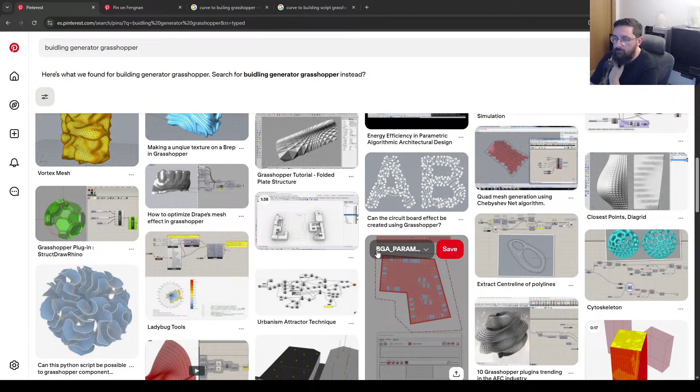I'm trying to find an example I saw for the inspiration for today's stream. Basically the idea behind today's stream is to have a contour, and then using that contour generate a series of building typology, I guess. I'm not sure what the best way to describe it would be, but the idea is to have a polygon and then use that to subdivide it.

I have an idea, but the thing is with this sort of script, it's very unpredictable and there's a lot of logistical things you have to resolve as you go through. We'll probably not have a super finished product by the end of it, but we'll have a strong sense of what direction this script will take.

I'm just trying to find the example I used, I guess. No, this isn't it. Urban architecture, Grasshopper script - there's this web page I found the other day, they do a really good job with it. Perhaps I can find it. Give me a sec, let me see if I can find the website. God damn it, I can't find it, I'm trying to go through my history here.

Anyway guys, tell me a little bit about your week. Are you guys studying, working? What's happening with you guys? Tell me what you've been up to. I'm trying to find it whilst you tell me what your week's been like.

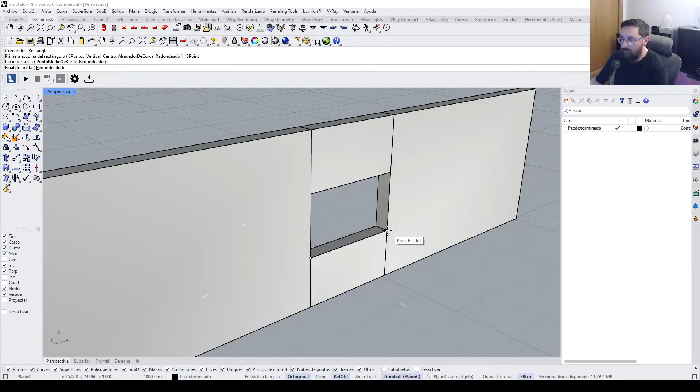So let's try and work out, because this is going to be like what we're trying to achieve, right? So my window frame is going to go here in the middle. The window is going to be whole drama, but we'll work it out, I guess. So what I'm thinking for the window is to have something like this.

Let's quickly see if I can model this. If you can't draw it, you can't understand it. So it's worth investing some time in doing a proper model of what we're trying to achieve.

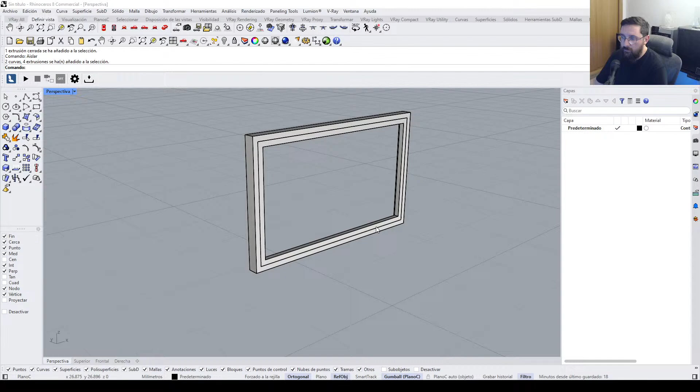So now the frame, we can simplify it, because for calculations it's probably better to simplify, but as a starting point I guess we could do something like this. So a frame like that where we can define the height, so we can go lower or taller. That's going to be one of our variables.

Okay, so we need to think about a logic on how to break or make these holes and windows. Imagine we have a curve, then we divide it, let's say in 6 parts, and split it into those segments. So we have a line partitioned in various parts, and we simply select every odd or even value, so we have 3 pieces of that line. Then we displace it, extrude it, and those are going to be our windows. From these surfaces we're going to generate the windows, and the rest is just going to be the wall.

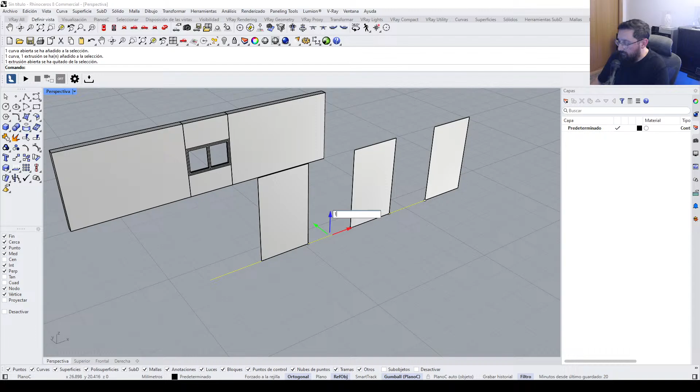So that's the logic, right? The rest is just going to be the wall. So this would be the walls, more or less, and these here would be the window reference. This would have a height of 1, for example, and then we could extrude by 1.2, and all the rest is the wall as well. This is sort of the logic I'm thinking of for this.

So what I'm going to do is put this in a folder, in a layer called reference. I'm going to turn that on and off whenever it's convenient to see. Now this is our curve.

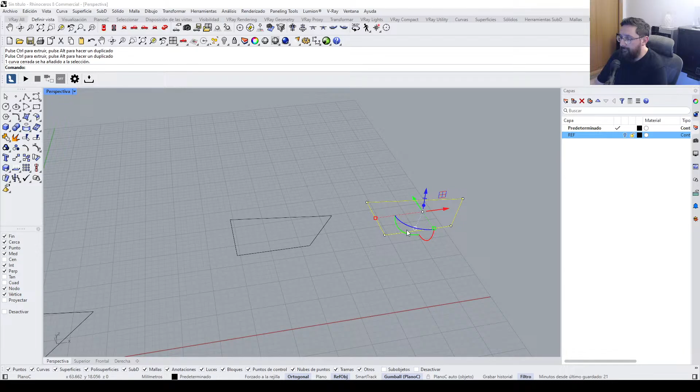Other issues that I can already feel have to be addressed at the beginning of the script are the normals, that's going to be one of the biggest issues. For those who don't know what I mean, if we have two polygons like so, and I flip one of them, rotate it 180 degrees, one is flipped over. If I generate surfaces from this and look at the normals, you're going to see the normal directions are different. So I need to find a way that if I have a million curves like this, I need all of the normals of all of these surfaces to be the same. That's going to be one of the first things we have to work out.

Is it best to work with NURBS or meshes? I think NURBS, just because meshes triangulate, so you're generating more vertices. And I think for Rhino it works a little bit better with poly surfaces. I wouldn't go into meshes. Personally I don't usually work with meshes, so for me it's a little bit of foreign territory.

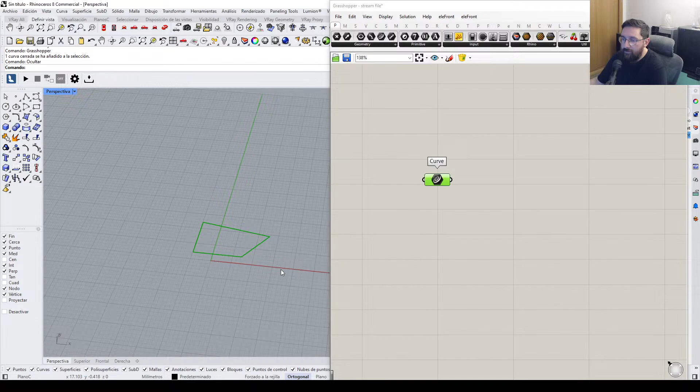So we have our curve. Then, as I said, we need to make sure that they're all flipped in the same direction. So how do we do that?

We can use what's called curve guide or guide curve, I don't know which one it is. Is it divide? No, guide. What's it called? Flip curve, I think it is flip curve.

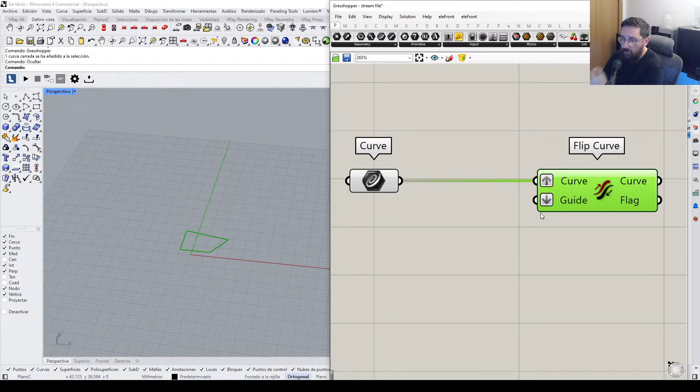Then we need to make sure that all of our curves are flipped by one guide curve. It's basically saying: I want you to flip all of these curves, all the curves we input, in the same direction as a curve that I assign. So to avoid any other references from Rhino, I'm just going to build a curve that I know is going to have a normal in the right direction, so I'm just going to use a rectangle.

I'm going to say XY, turn this off, the size is irrelevant, by default it's going to be 1. And then this is going to be my guide.

So to test this, I'm just going to do lots, and then some of them I'm just going to flip. So let's say this one, this one, this one I'm going to drag, I'm going to flip in the other direction. And I'm going to reference all of these curves here, set multiple curves, and then convert them into a surface. I'm going to turn all of this off for now.

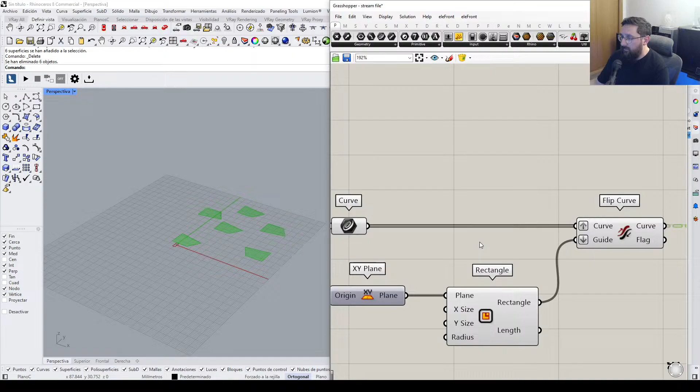I'm going to bake, and then review if it's working. Let's see, just quickly look. Yes, you can see that despite being flipped in other directions, it is now working. Whereas if I just extract it from here, you're going to probably see that one's flipping down, one is up, down, whatever. So our first crisis is already resolved, and trust me, that's probably one of the biggest headaches.

Okay, so we have this curve. I'm going to reference here, turn this off. Okay, so I now have my curve. Now this is where we have to think a little bit.

Okay, so I have my surface. I don't really need the surface now, I know that's going to come up later, so I'm just going to turn this off. I'm going to turn this off as well. I'm going to save for now, and I should probably save my curve in case something happens.

Let me try again, that didn't work. Save. Base curve.

So the next thing we need to do is work in segments, I guess, because we need to cut each segment individually. I just think it's going to be a little bit easier. I'm going to use explode. I have each segment separate.

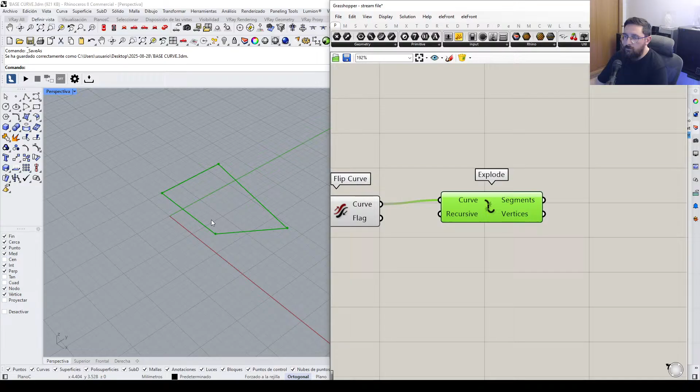Now, the idea here is to... okay, let me think about this very carefully. I'm going to start off with kind of a logical system, but I'm sure there's something we have to do in between.

If I divide, for example, in 5 parts, like so, I can't have my window here in this corner, or here, right?

Let me see if I can quickly draw. Let me see if I can get this working. Okay.

I need to make sure that this curve here, or this segment here and here, are not considered. And then this one is considered for the window, and this one is considered for the window. I think that's going to be the right approach. And this is going to be wall. So I need this to be wall. I need this to be wall. And then I need this to be window, window. And I need this to happen in all of the segments, right?

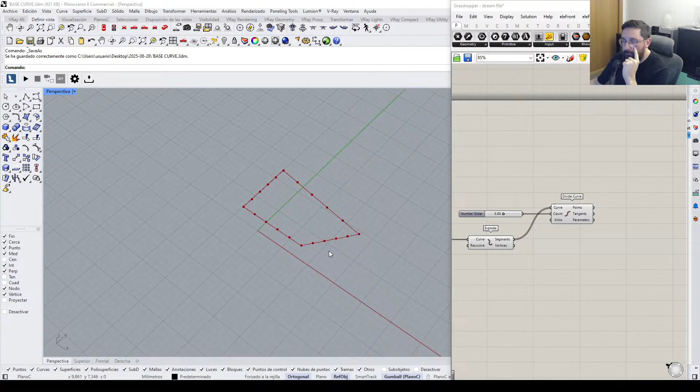So how can I ensure that I'm only affecting from here to here? Right, from here to here. I need to extend the curve this much. I think that's going to be the way to go. How can I do that? Can I eliminate the first and last curve? Or I could probably just extend it.

So I need a variable between 0 and 10. Let's say our window is going to be 2 meters in length. I'm going to call this window width.

Okay, so that way we know what it is. I'm going to disconnect this for now. I need to extend the curve, this one here, and I need to extend it in the negative direction, right?

So if I turn this off, I'm now resolving that issue. I'm getting rid of this. This isn't even considered because we have a new curve. We have a new curve.

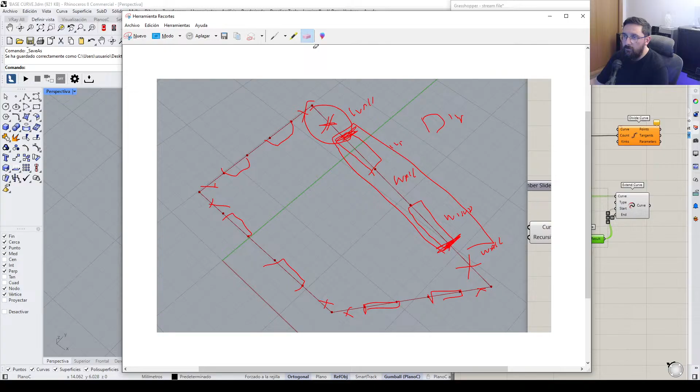Let me see if I can quickly delete all of this so we can see things properly. There we go. Okay, I need my curve to go from here to here.

We've reduced X, which is the window width, right? All of these divisions are X, right? So we've just removed X from here, and we're left with this line in the middle, and that's going to be our working line to generate the windows. I think that's the proper way to go around this.

I'm open to suggestions, by the way, so let me know. Okay, so this is the window width.

So if I have this curve, I'm going to measure the length because I don't know what the length is now, and then I'm going to do division because I want the length divided by, no, by the window width. That will tell me, so if I wanted to drive the script by window width, I would have to measure the length, divide it by the width, and that will give me the number of divisions, right? So let me just jot this down.

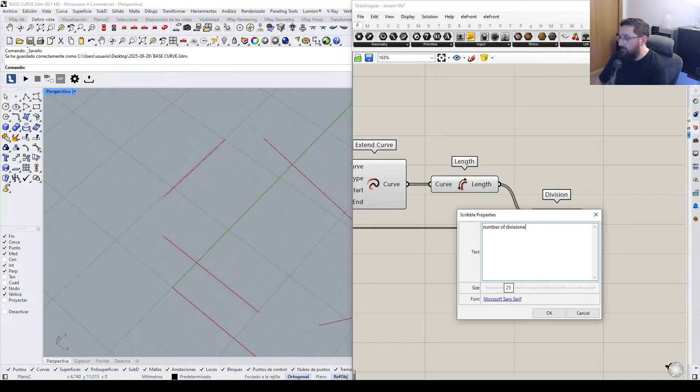Number of divisions, right? This will be this here. So there's going to be 4 values in this case, and then it will round it up. So I'm going to use these values to divide each curve, right? Curve, oh sorry, wrong, there. And the curve we're dividing is this bad boy here.

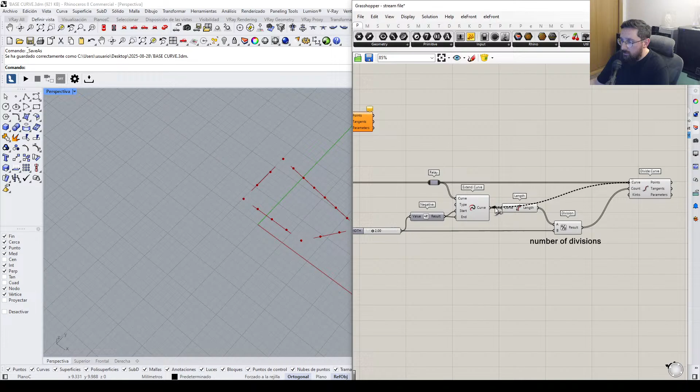So I think for this script we have to be as neat as possible, otherwise we can just go a bit overboard. So we're subdividing, oh no, that's the wrong curve. I need to subdivide the extended curve there, like so. I can get rid of this.

Yeah, you could also do that. I just think this one's a little more, I don't know, it's kind of the same thing eventually. But yeah, you can do it with the culling. You would have to cull the last and first of each one. Or you can just extend it, it's the same thing.

And then this way, when I divide it, I think the count... okay, let me work this out. The smallest curve, which is this one, is dividing by 2, 3. How's it rounding it up? This is the number of segments, that's correct. So I don't need to do any expressions or anything here.

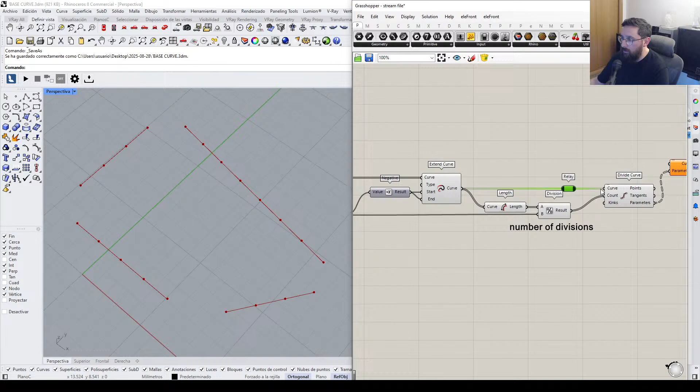Okay, so the idea is to shatter the curves, to cut the curves using these points, right? So I have these curves and I can just cut them using this here. I think I may need to graft. I'm just going to bake this to see if it's working. 1, 2, yeah, it's working.

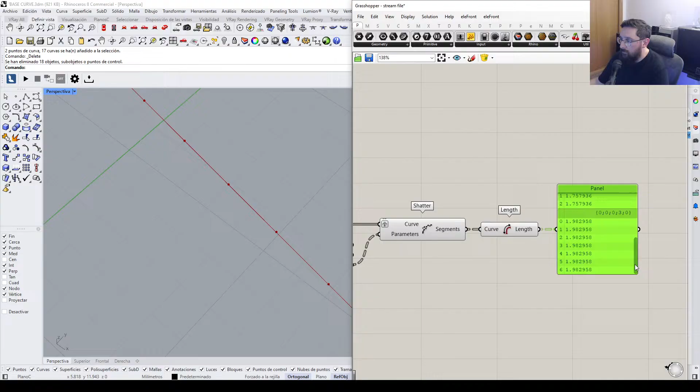Now, the issue here, I'm guessing, is that the length of each one of these curves is not exactly 2 meters, right? Because the divisions are not super precise. So if I were to use a length, and I measure this here, I get a length of 2, and then you get these decimals, which are bloody annoying.

Okay, so let me try and work this out. I can use an expression to sort this out. I could kind of guess this was going to happen, but I don't think there's a workaround or an elegant one. The idea is that if I have a curve which measures x, and I want this to be y, I know that x times a number equals y. That number equals y divided by x. Now y is going to be the window length, and x is the current measurement.

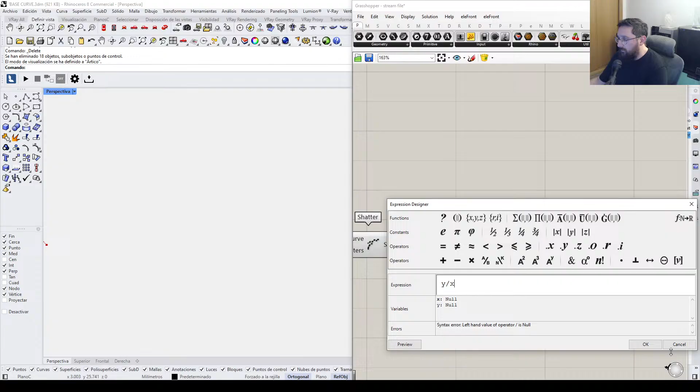So expression, I could just use a multiplication, but same thing. What was it? Y divided by x, where y is the intended value, which is this value here. I'm always referring back to the same number slider, this one here. Let me just get my cables right.

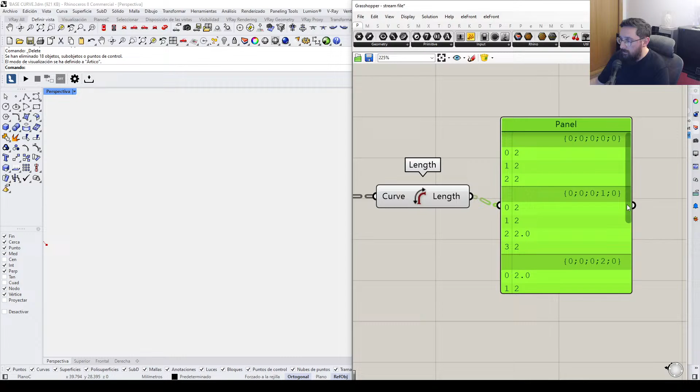By this value, and then I'm going to be scaling from the middle. This is me being super precise. By this value, and this is my curve. And then this way, in theory, if I measure it now, I should have 2 units exactly, right? In all of my values: 2, 2, 2, 2. So this is just being a super perfectionist.

And then if I change this value to 2.3, for example, if I do a before and after, it would become a little bit more evident. Where if I measure the lengths here, you're going to see that it's not 2.3, it's always going to be like 2.2, 2.3 — they're all different. But doing it this way, I'm making sure that all of the lengths of the windows are actually correct. Hopefully that made sense.

I'm going to leave a note here actually. I'm going to put this in a group. Put scribble, there we go. This is to ensure that the window width is exact and not approximate.

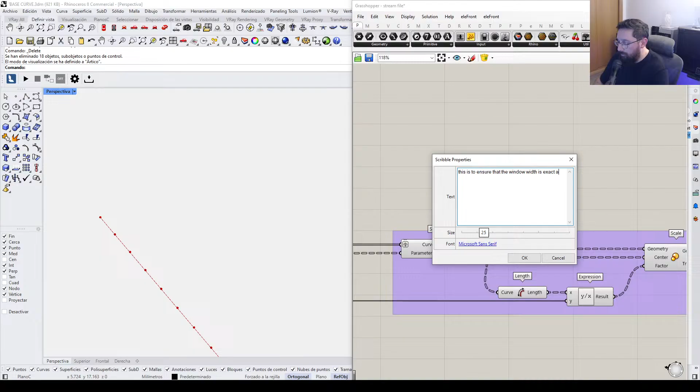Okay, so I have the curves I need. I'm going to turn everything I don't need off. And then here, this is where we're going to dispatch, and then we just choose one of these. Now I am going to simplify over here. And here I'm just going to turn this off. And we here now have the selection, right? We could choose the other, either one, it's fine. I don't think it's going to be that much of an issue.

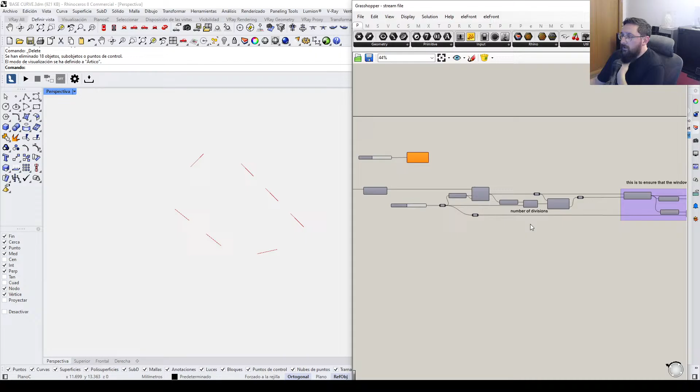So I'm just going to go ahead and save. And already it's starting to look interesting. Now, the hardest part of this sort of script is memorizing where and why we did everything, right? Give me a sec, guys.

There we go. So this controls the number of divisions, the points generated, extended curves. Okay, so we have these curves. Now this is where it gets interesting. Okay, so let's define the windows. So this part of the script is going to be the windows. We'll sort out everything else afterwards.

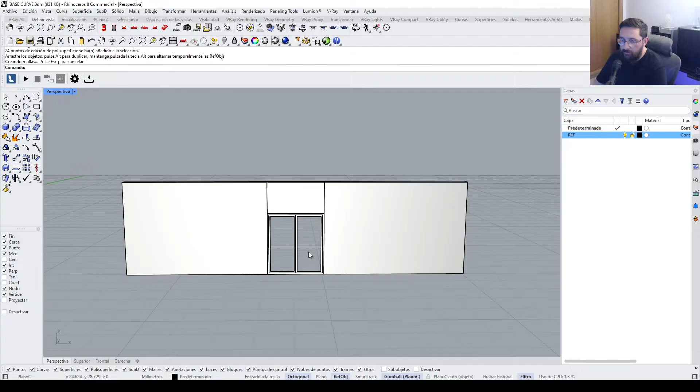You know what? I'm thinking that instead of having windows, why don't we just do balconies? Right? So if I use my reference, instead of having windows, we can have the window starting from the floor going up like that, right? And then we can change the height and the width. I think that could be interesting. That's going to be a lot more interesting.

Okay, so we have the curves. So we need to define the height of the doors, so this is going to be Z. Number slider that goes between 0 and 5, we're going to be generous. I'm going to say 2.2.

Is it best to use Elefront or build? You could use Elefront, but it's a little bit more... I don't know, you're relying too much on a plugin. I tend to try and use as many native components as possible.

Anyway, we're going to be only doing one floor, and then we're going to copy and paste that many times by whatever amount of heights we want. So once we're done with one floor, we could convert it into a block and then copy and paste a block, right? I reckon that makes a little bit more sense. But yeah, I like the way you're thinking, because it might be a little bit better.

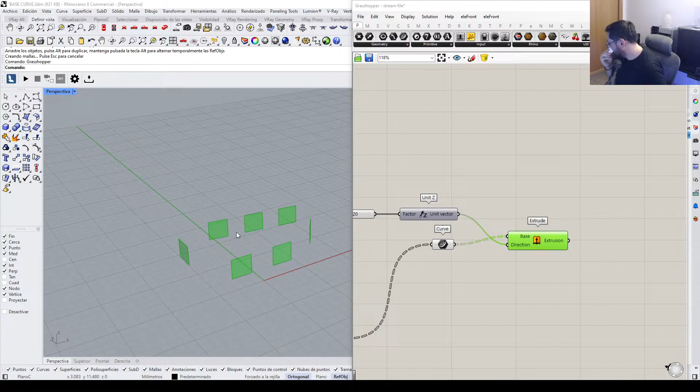Sorry guys, the thing is, here in Spain it's really bloody hot, and then we have to have the air conditioning on all the time, and when you change from one temperature to another, it kind of produces this allergy. So I ask for your lax judgment.

Okay, so we have the extrusion. I'm going to put this over here. This number slider, I'm going to change the name. This is going to be the... let's call it door height, because it's no longer a window, it's now a door. Door height.

Okay, and then we're going to basically generate the window here. Now, how can we approach this? I want to subdivide this. So if perhaps we don't want 2 frames, perhaps we want 3, right?

So what I'm thinking is that we can use an Isotrim. What's the component? Construct domain. There's one. Is it divide domain? Yeah, this one here. Ha, found you.

Between 0 and 10, I'm going to say 2. I'm going to copy and paste this. This is going to be 1. My domain is going to be this surface. This is going to be here. And this needs to be reparameterized.

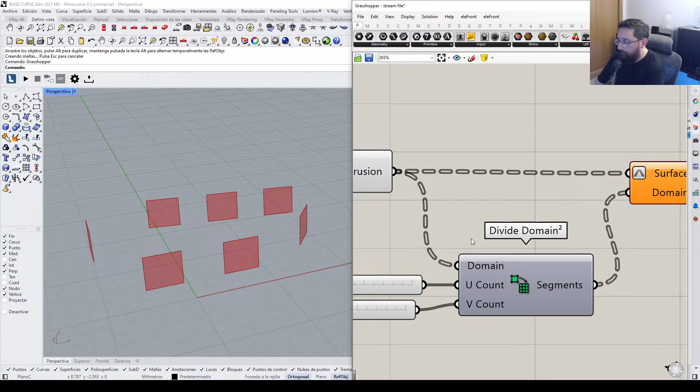Is that right? I might be wrong. This might need to be reparameterized. I don't remember how to do this. Do you guys know? I basically want to divide this. I don't want to use a plugin. That's the thing, I know there's... I would usually just use...

I would usually use Lunchbox. The surface here, reparameterize. I think this needs to be reparameterized, but it doesn't have the option. So instead, I can just do it here. I don't have the option. Why? Simplify. Why don't I have the option? I mean, I can just do this, reparameterize.

Or actually, I can just turn it into a surface. And I know for sure that the surface allows me to use this, there we go. Haha, you won't beat me, grasshopper. I will always win.

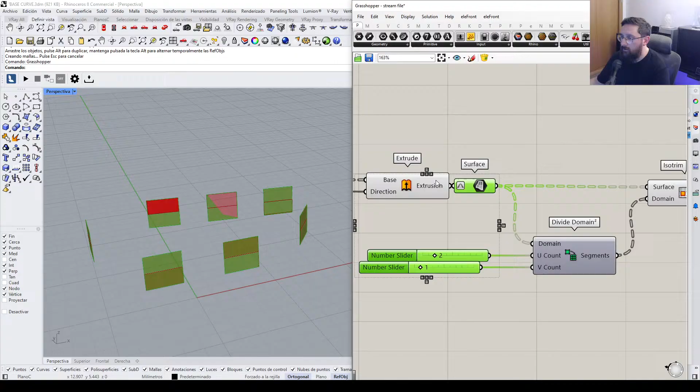Okay, we're back on track. So here the surface is... there's something wrong here. What's happening? Simplify, no. Domain, surface, extrusion. What's happening here?

Do I need to graft? I did need to graft. Okay, there we go. The other direction, so this would be 1 and this would be 2.

So you can see here, if I zoom in, you can see that I now have the frame, right? Whereas if I want 3 frames, I can do 3. Don't know if you guys can see it there. Yeah, so we have that.

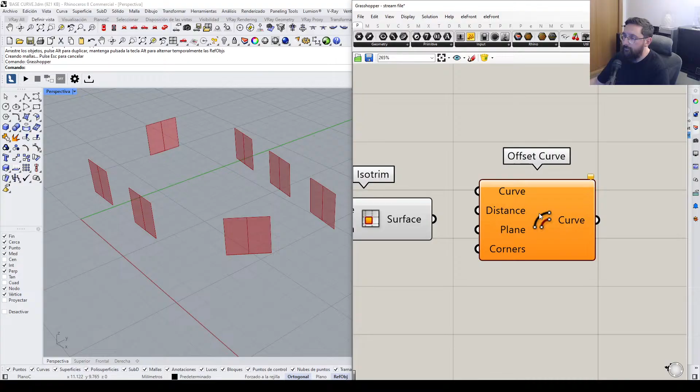Now we need to do the frame in the interior. So I'm going to use an offset curve. Where are you? Offset curve. I need it to offset inwards. The frame thickness, I'm just going to say between 0 and 1. And I'm going to set the value at 0.05. This is my curve. Now, I don't think it will always go inwards.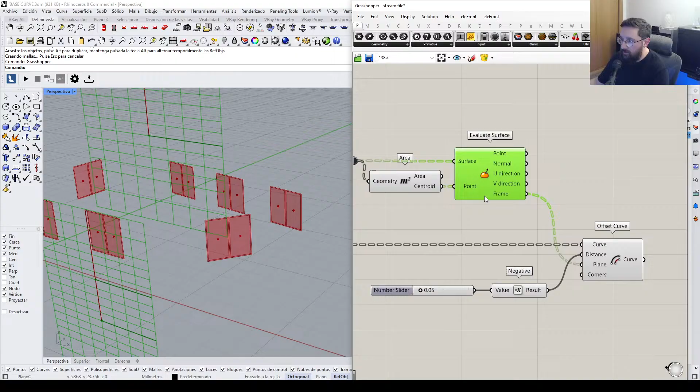So I'm going to make sure it's always going inwards by using an evaluate surface. It requires a point. This is my surface. I'm going to just do this. That way I can have the frame, and the frame is basically always going to define which direction is inwards and outwards, because you're basically saying you want the direction to be towards the centroid, not out of the surface, and then it's contained within the frame. So it's understanding that negative is going inwards.

Okay, so we have this. We now have the door. Now we need to actually create the frame. Okay, let me just quickly change the name of this. This is going to be door frame thickness. Let me just drag this out.

What's the difference? It's the same, but in this case it's giving you like where it's contained, I guess. But yeah, essentially it's just a plane, and it gives you the normal directions too.

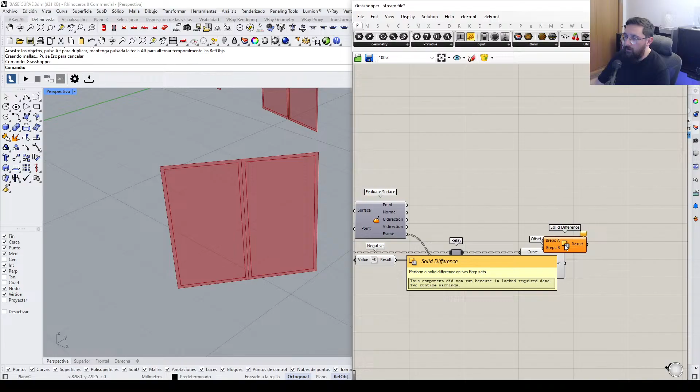Okay, let me just push this out of the way. I'm going to do a solid difference here. The outer curve, which is this one, I need to make sure it's grafted before I do anything. Graft. I'm also going to simplify just in case. Graft, simplify. This is going to go there. And then this way, I now have the frames like so.

Okay, so we have that, and I can convert this offsetted curve as the windows. So this is the window, this is the window frame. We can give this a thickness, but for computational reasons, I'm just going to leave it without a thickness because I know it's going to take longer to load.

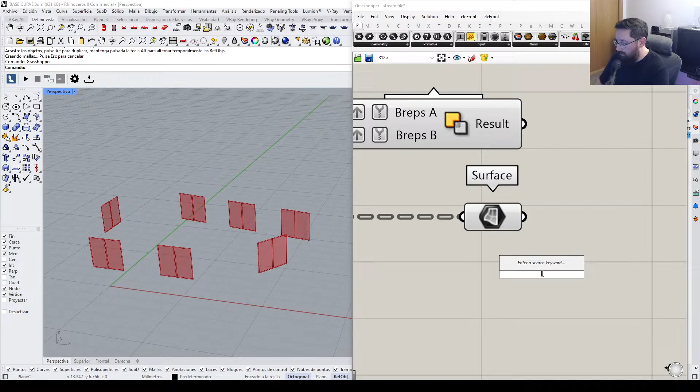So what I'm going to do is give it a custom color just so I can visualize this a little better. I'm going to use color swatch. This is going to be baby blue. And then the frame could be black, and that way we can differentiate it a little better.

Let me just line everything up. So I'm going to change to black, and we have our window frames. Okay, we're getting somewhere in life. Let me just think how I can make it better. Yeah, let me just leave it like that actually.

Okay, so we have the windows, right? I'm going to turn that off. What I'm interested in is this plane, because now the logic is going to be the following.

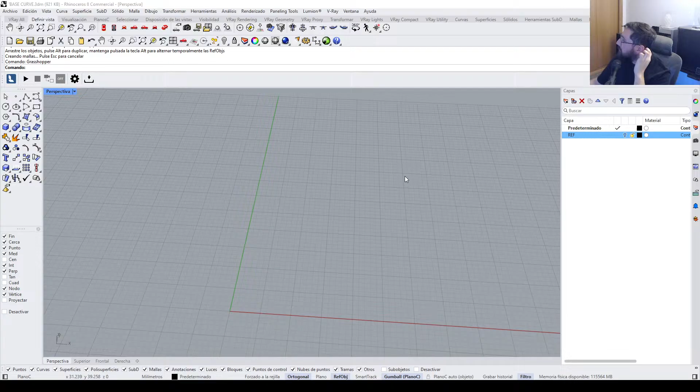So we're going to have these walls, right, with a thickness of 0.3. This wall's going to have a height. Why is it not extruding? There you go. We're going to have this wall, and then the plane or extrusion we have from before.

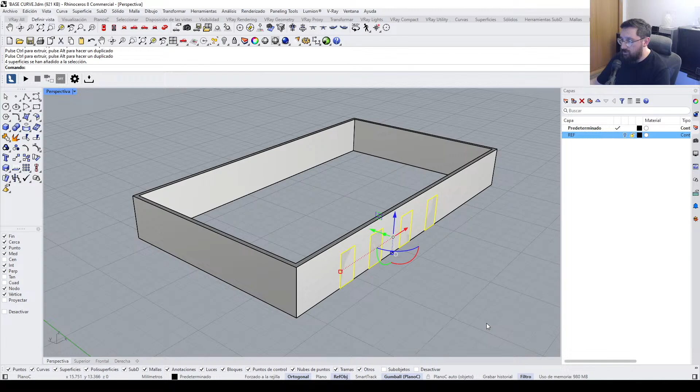Let's imagine this is my door. Let me line it up. We create the wall, and then we'll have all of these doors. What I need to do is extrude these doors inwards or outwards, that's something we have to define, and then do a Boolean difference between these two, so that we have these holes, and our frames are already inside so we don't have to do anything there. That's the logic.

Will it work? I don't know, but we'll work it out.

Okay, so these are my windows. I need to go back to my curves, so let me extract that from here. This is my base curve. I'll bring this down. This is my base curve.

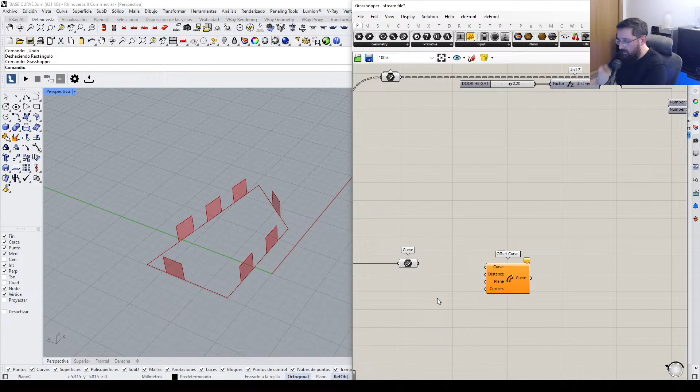Okay, so I want the frame to be inside, so I'm going to offset outwards. Offset curve, direction positive. That's too big, I'll say a thickness of 30 centimeters. It's already in the right direction because I've already flipped the curve before.

Okay, let's change the name, this is going to be wall thickness. Okay, now what are we going to do? We need to do a solid difference between the big curve, the outer curve, minus the inner curve.

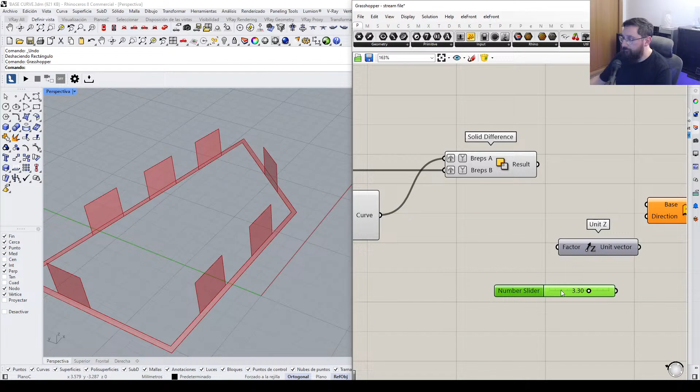And I need to make sure it's grafted, so graft, graft. I'm also going to simplify just in case. And then here I'm going to extrude in the Z direction, whatever height I want, I'll say 3.3 between slabs. This is my direction, this goes here. Okay, this is wall height, an important parameter.

Okay, I'm going to leave that on standby because we need to do a few things before. I need to extrude these surfaces in the perpendicular direction, making sure it always goes outwards. How do I do that? I would have to create a custom vector according to this offset. Now, how do I do that?

Okay, so I can do it using vectors, or I can do it with evaluate surface. Yeah, but how do you tell Grasshopper that you want it in the direction out of the polygon of the base curve?

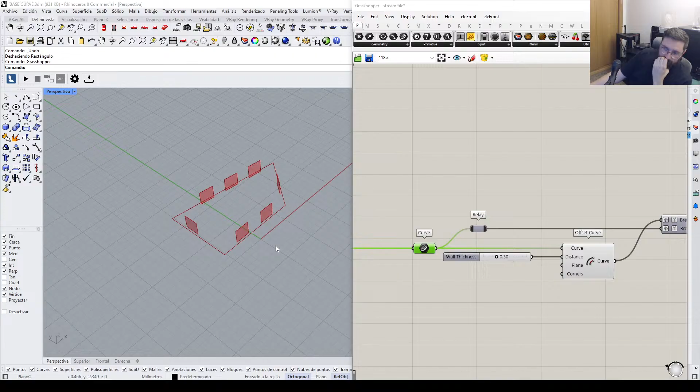Okay, I have an idea. We have these curves, right, we have the bottom curve. I just need to tell it a direction, so we can create a direction. I need a vector, and a vector is defined by two points. So I need a point on this curve, then another point on the outer curve, and connect the two. I need to make sure it's perpendicular. Okay, so if I extract the middle point of this curve here, I need to find the perpendicular to this curve here, which is essentially the closest point.

Curve closest point, this to... shit, so this one. There's a lot of unknowns though, because I'm always talking about one curve, but the idea is to have more than one, so I'm not sure how that's going to match up. Ah, it matches up fine.

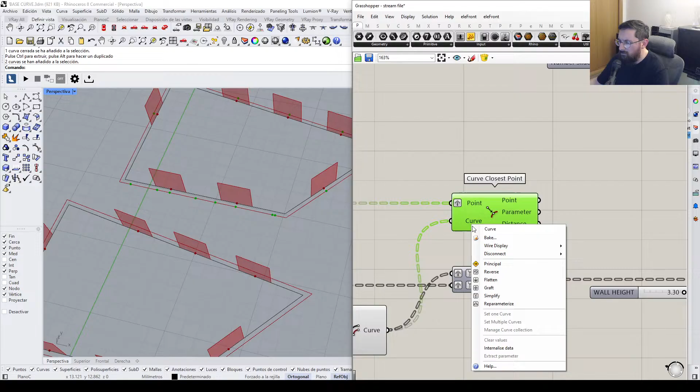Ah, here you see it creates these duplicates because I need these to be grafted as well. This is where it gets tricky, my friends. I don't need to simplify, I can't simplify before. Yeah, this is where it gets annoying, annoyingly tough.

Any ideas? I'm just going to quickly draw something, see if this works. Help me out, guys, help me out, help me. It's that part of the script where you're like, oh lord. How, if I find the closest point.

Surface is this one here. Do I simplify? Is it? I don't know, I'm actually quite gobsmacked. The issue is that distance here. Graft, no. Simplify, I don't know, this is where...

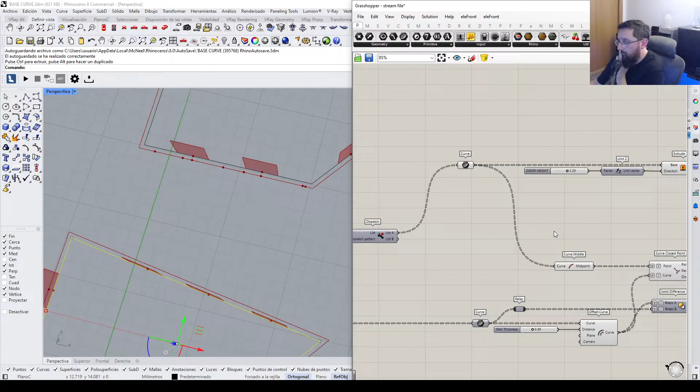Here, this is my curve point. I just don't understand why it's not taking this one into account. It's taking this one. It should work, like, that's the thing that's bugging me.

It should work. Okay, so this has two points. Why do I have two middle points? Oh, because this is based on the curve. Some curves have more segments than the other. Polyline, here I have this.

So I should probably simplify this one. Here I have one. If I simplify this one, I still have... that means I should probably simplify further back.

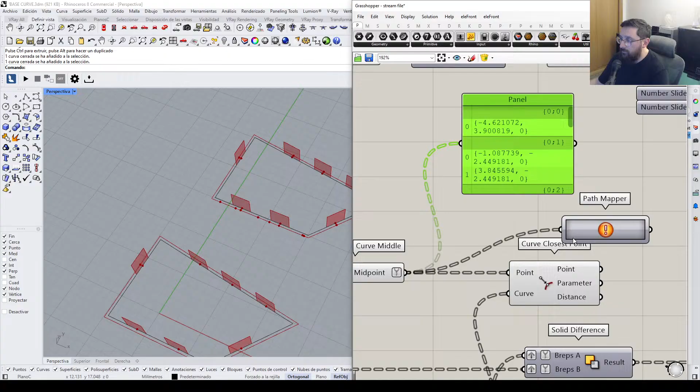1, 2. Is it a graph mapper? No, path mapper, where I filter out, for example... there we go, yeah, it's the path. Okay, fair enough. It's something to do with the tree. So I now have, okay, yeah, fair enough, that works.

Yeah, you just have to be really hyper aware with this sort of thing. Okay, that works. Okay, so we have the curve, not the curve, the point rather. This is now the points. I need to create the vector, so vector to points. The direction is from in outwards.

This is a mosquito. Unitize and amplitude, because I wanted to find how long the vector is considered. The length has to be the same as the offset, so it has to be the same as this.

Now, just to make sure everything is nice and neat, I'm going to put this underneath. And actually no, I'm going to put this underneath. Bang, bang, I have the vector. I need space, so I'm going to quickly bring this down. I have the vector. This is what? What's this? This isn't... oh, this is the wall.

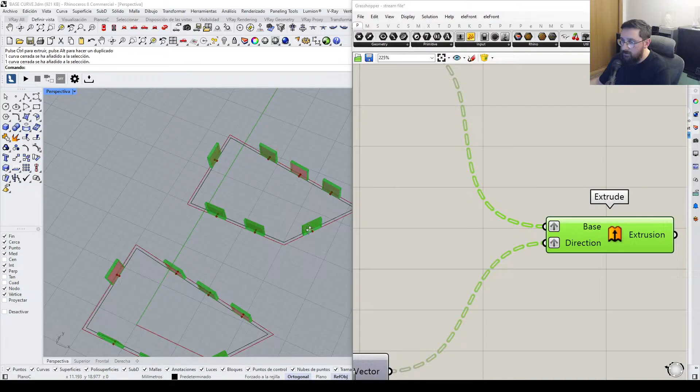So I need the extrusion. Let me move all of this over here. Extrusion, extrude the extrusion. Bang, and I need to make sure this is grafted. And we have those solids. Okay.

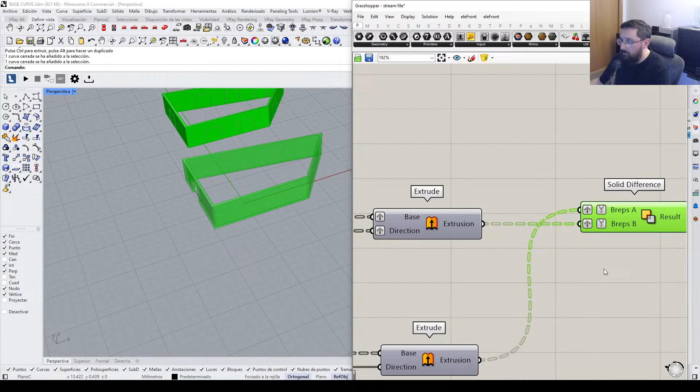And then here, solid difference. So I need to graft, I need to flatten this. Or I can graft, I think. It might work with the grafting. Yeah, or maybe not, simplify. Ah, that's annoying. There you go, okay, that worked.

And then here I have the windows. Ah, there we go. That worked. Okay, so I mean, you can always add to this. I'm thinking of doing a terrace. So the good thing is that we have the vector defined, and this is going to be super useful for us.

What I'm going to do is label things a little bit. Let's see if we can synthesize this a little bit. Okay, so this is going to be the wall thickness. So what I'm thinking is to have a balcony. Why am I doing this to myself? Balcony, okay, so let me just turn this off.

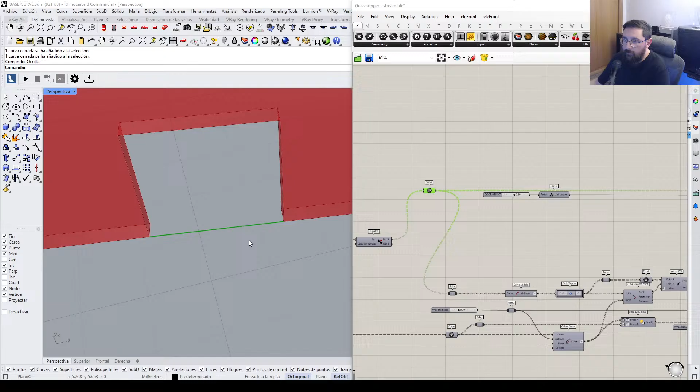I have this curve from before, right, which is the 2 meters or whatever the balcony width, the window width is. So if I actually reduce that for now, let me say I want my window width to be 1.8. I want it to be smaller.

What I'm going to do is here in this curve, I'm going to do something similar to what we did before where we scaled it to a certain length. So you remember we did this. This is to ensure that the window width is exact and not approximately.

What I'm going to do is I'm just going to copy this, disconnect everything, disconnect, disconnect, disconnect this as well, and we're going to do the same thing.

This is my curve, I need the middle point. This is my length. I want the balcony to be, let's say, 3 meters. 3 meters wide.

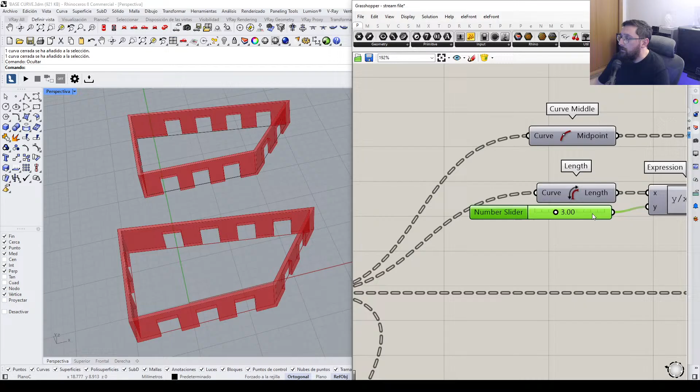So, what curve? This is my curve. Here, that's going to be my width. Oh, that's probably a bit too much. Okay, so let's say 2.4 to be, you know, conservative.

So, and I want to extrude this in the same direction, so I can use the same vectors as before, as I did when we extruded the window surface thing. Let me just kind of connect everything a little bit nicer. So this, I need to extrude this in the same direction as before, with a different value.

So I'm going to use a different amplitude, and this is going to be my overhang. So I'm going to say I want my overhang to be 2 meters, and this is going to be my extrusion.

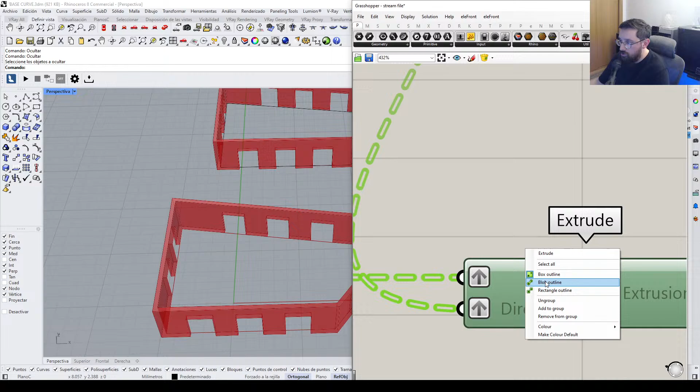Now again, I need to graft. So let me just quickly disable. I need to graft, and I think I may have to simplify, I'm not sure. I don't need to simplify or anything. Okay, good. Okay, I need to make some space. Okay, what I can do is this.

I want to be able to see where everything is connected. Okay, so this is going to be my balcony. That's going to be how much I want to go out. So I'm going to call this balcony overhang.

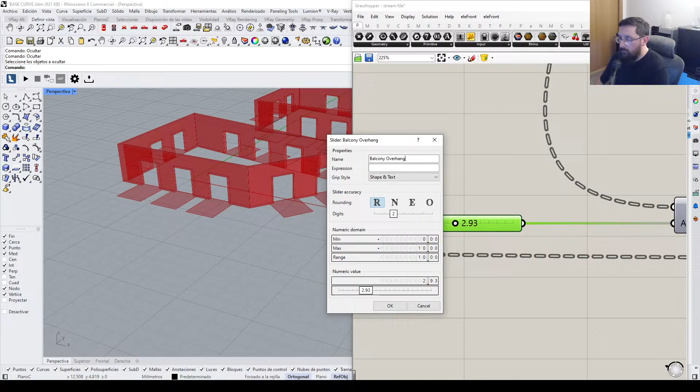Let me just check everything, one sec. Give me a sec. Just making sure you guys are alive. There we go. Okay, so we have the balconies. We need some sort of railing, and we need to make this a slab.

So let me just go ahead and make this a slab first. I'm going to extrude in the Z direction, negative direction, with a value of thickness of 0.3, like so. Okay, this is slab thickness. Okay, put this over here.

This is going to be put at the end because that's going to be one of the final outcomes. So I'm going to put that down there. Oh, that's not aligned. Okay, so we have the balcony floor. What I'm going to do is deconstruct the BREP, like so.

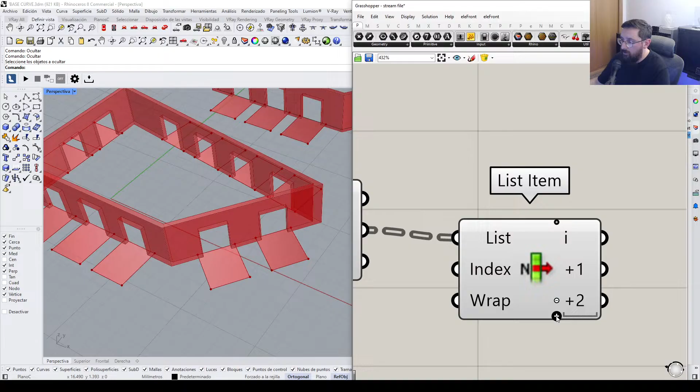I'm going to extract the edges. Now I don't know which ones I need. I know that the balconies are square, so I just need to find which ones I'm interested in. This one, this one. Okay, it's in order. That's good. And then join curves. There we go.

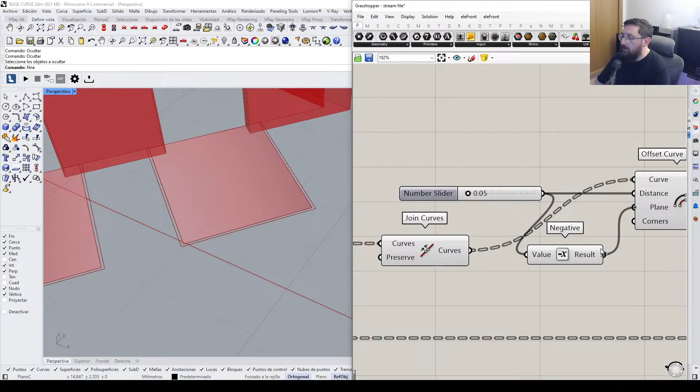And we're basically going to offset this inwards. Offset inwards, distance is going to be the thickness, I'm going to say 0.05. Curve, is it going outwards? I need it to be inwards. Negative, negative, negative. Oh. Okay, negative. Thing is, I don't know if it's always going to be inwards.

I think it may be, just because we did the whole evaluate surface thing before. But I guess you can never be too sure. So I think it might be best to make sure it's always going to offset inwards. So I'm just going to quickly use an evaluate surface, same thing as before.

Area, faces. This goes here, this goes over here. This is going to be my frame, and that's going to be my plane. Just to make sure, so that goes there. I'm just going to quickly relay this over here as well.

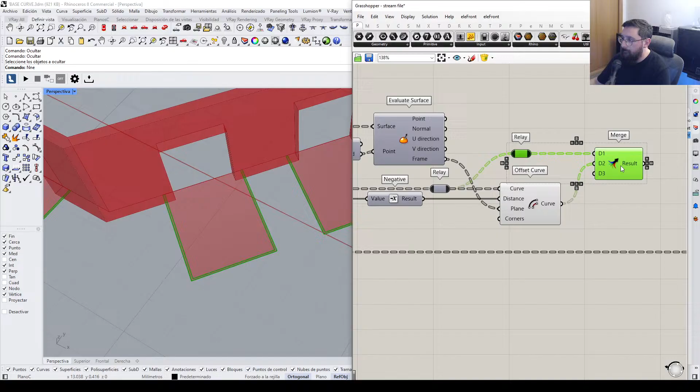And we should have that there. And then I can just loft these two together. Merge, because they're simple geometries, it's not going to be an issue for the loft. We're lofting between this and this. I need to make sure it's grafted. Simplified, simplified, loft.

And then this is going to be what we're extruding. We're extruding this in the Z direction, positive, yes. Height of the railing is going to be, for example, 1.1, like so. Let's do this like that. And we have that railing going on.

Now, I don't like this being in here, so there's something I'm going to quickly do. I'm going to move in the same direction as this, but the amplitude is going to be the wall thickness, which I can't remember where it is. Here it is. The wall thickness, where are you? Here.

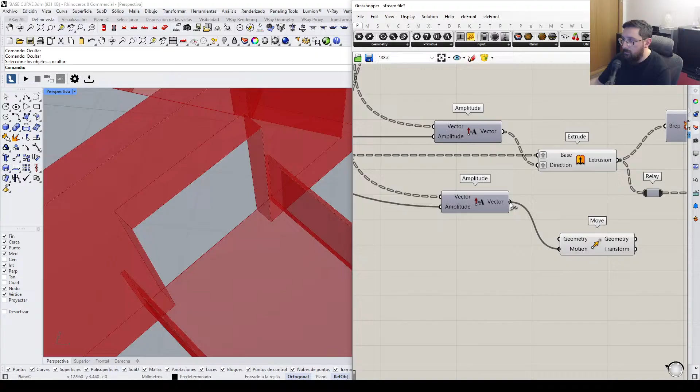Done. This goes here, this goes here. That way I can make sure. Oh, did it work? No, it didn't work, did it? I don't think it worked. Ah, because I'm connecting the wrong one.

A ver, este va aquí. This, I've done something weird here. This, what's happened here? I don't know what I've done. Let me go back. Okay. Oh, okay, I see what I've done.

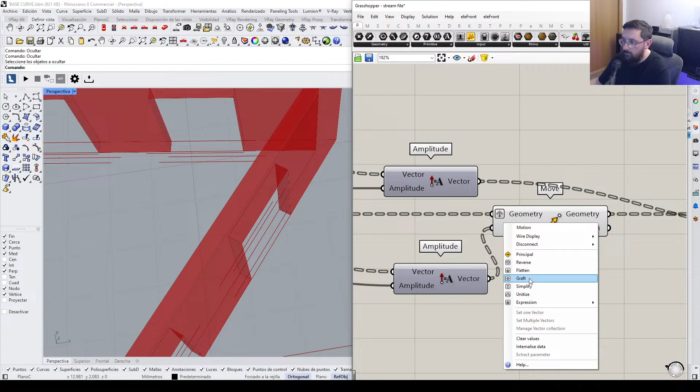This needs to go here, and then this goes here. Oh, okay, let me just make sure everything is correctly connected. Turn this back on. There we go.

I didn't want it to be inside because when I copy and paste this, this floor is going to be the top part of the wall. Ah, my friend, I see what you mean. I see what you mean. Okay, yeah, too late now.

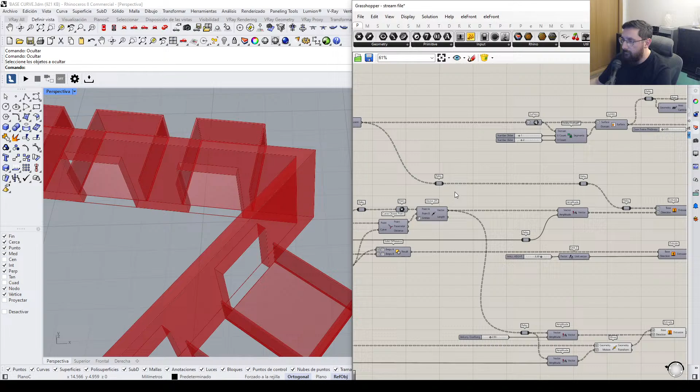Okay, let's bring this down over here. Man, this is spaghetti town. The vector's the same, so I can just connect this here. There, bring this closer. Yeah, okay. More or less I can see where everything is. I'm also going to clean this up a little bit too. More or less.

Okay, so I have the walls, I have the railings, I have everything I need. So I'm going to put everything, all the finished products of the first floor, towards the end, like so. These two, well...

The issue here is that I don't want to see the previews, but I'll fix that later. Align this, turn all of this on. Perhaps it's a little bit easier if I use a custom preview. And I have something like this. The overhangs are a bit too much. What was this? 1.1, okay, this is balcony railing height.

What the hell's this? Railing thickness. Balcony railing thickness. Like so.

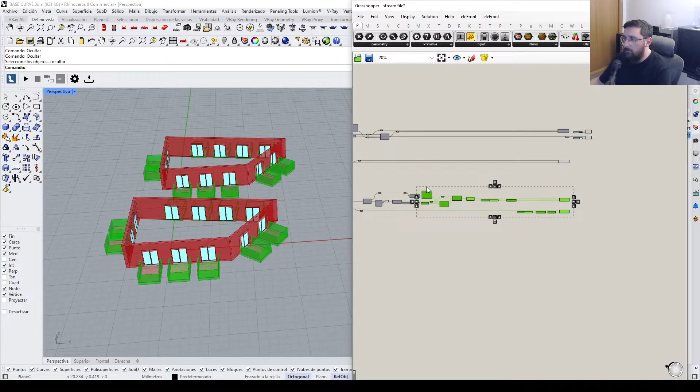Okay, we have this. I'm going to save because I haven't saved in a while. I don't need this on, I can turn everything off. I need the slab though, right?

That's going to be my base geometry, which is a flipped curve. And that's going to be extruded negatively in the Z direction, by the same thickness as the balcony thickness.

There's a lot going on. Okay, let me sort this out. Let's put this down here. Let's bring this all the way wherever it is. I'm going to bring it down here, and wherever it has to be.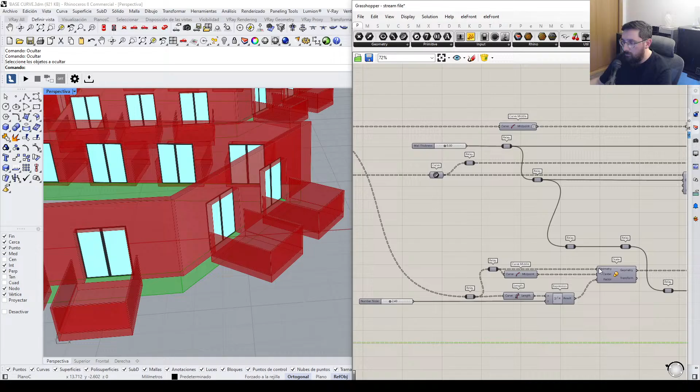It's 0.3. Where are you? Wall height? No, it's not that. It's the balconies, I don't know. It's not here, it's here at the end. Okay, good.

Here. Bang. What happened here? Extrusion, ah, I need to make a surface. There we go, and we have the slab.

And I think that's pretty much it for the definition of this thing. What I'm thinking is that overhang is pretty excessive, so 1.5, and I could probably make it wider.

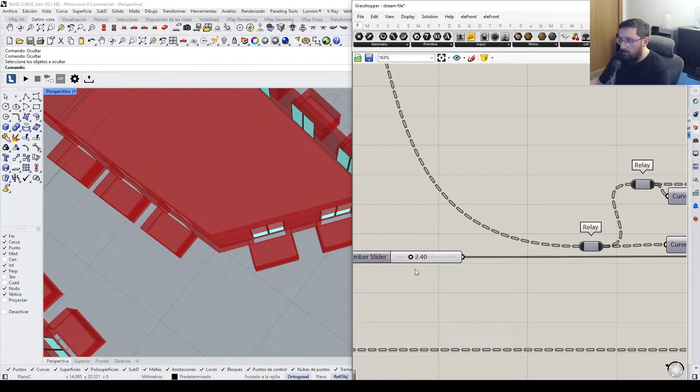Wall thickness, no, where's my balcony thickness? I need to put these at the beginning so I know where everything is. Door height, no, that's not it. Is this it? I think so, this is probably balcony thickness.

Let me change this to 3. Indeed, balcony width, I mean. Okay.

Okay, so we've done that, and now here's the part where we have to copy and paste upwards. So I'm going to use the series. How many floors do we want? Well, that's going to be up to us. I'm going to say for now 5, to start small.

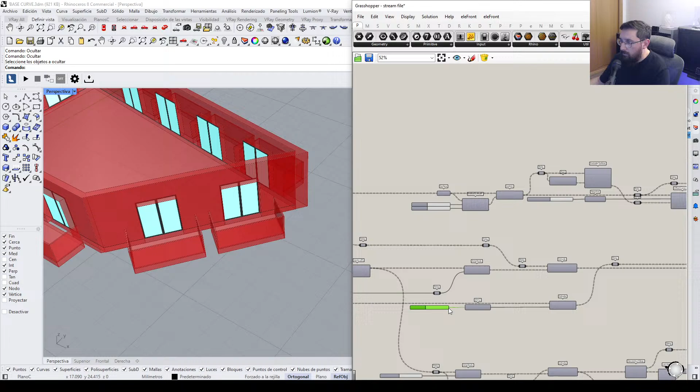What's the height difference in each floor? It's going to be the same as the wall height, so I need to go locate that. Here's my wall height. What I'm going to do is, my wall height is going to be there. That's my wall height.

Okay, wall height. Stories heights, I'm going to disconnect this here for now. Move this over here. Okay, so my wall height is 3.3.

This is Z. I need to move in this direction, this. Copy paste, this here. I'm also doing the same for the wall.

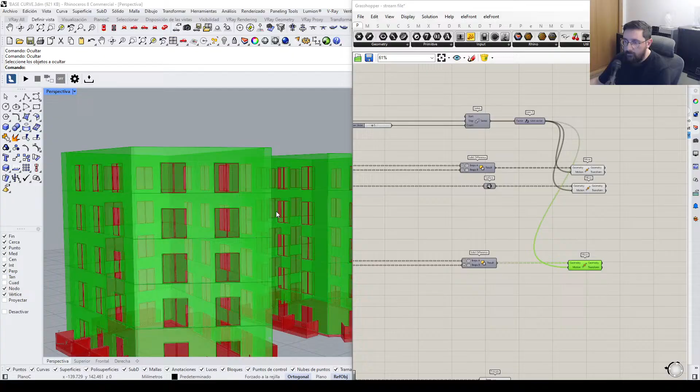And what's happening here? Yeah, let me just connect this here. Bang, bang, it's black, turn this off.

And I need to do the same for the balconies. The only thing is, balcony on the first floor doesn't make sense. So I'm just going to create another one here where the starting height is going to be 3.3, and that's going to be for the slab and the balcony, I think.

But I don't want railing at the top, nor do I want the balcony thing, so I'm going to need another one. Okay, here we go, share this here. I need another one, another one. Copy paste.

In which the starting point is 3.3. The step is also 3.3, but the count is -1. I think that's the logic. X -1. Bang. Bang. Ooh. Bang, bang, bang. Bada bang, bang, bang.

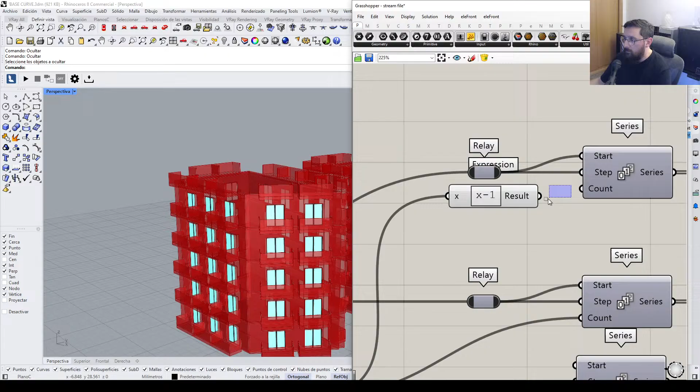I think that's the way to go, and that we said for this and this. So what I'm going to do is a quick cheat, and this goes all the way up here. There we go.

And there's probably a lot of things I need to fine tweak, and I would probably have to stress test, because there's probably a lot of things we're missing out on. But as a first start, I think it's pretty solid.

This is the balcony, where I'm just going to make it a lighter blue. Sorry, not a darker blue, rather.

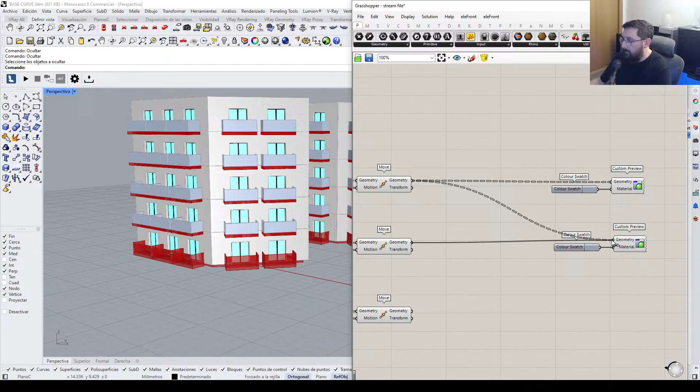The slab should be the same color as the balcony slab. So I'm going to quickly do this. Bang, bang, bang. There we go.

And then here, you're going to see that on the first floor we don't have any balconies, but we do have windows. Reduce the size to 4. What do you mean, the height?

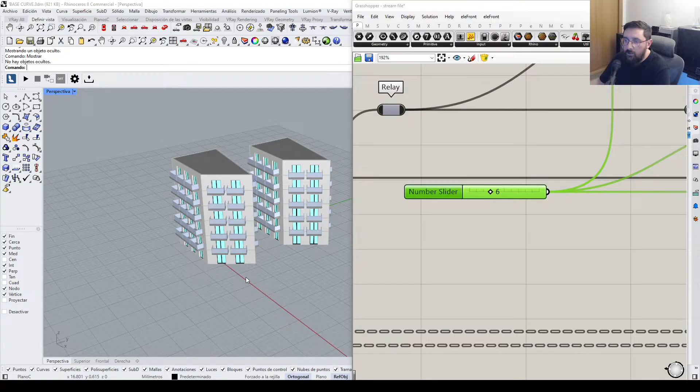There we go. And then here, the cool thing is that we can now make this bigger, smaller, and it will adapt. There we go, that's the idea, I guess.

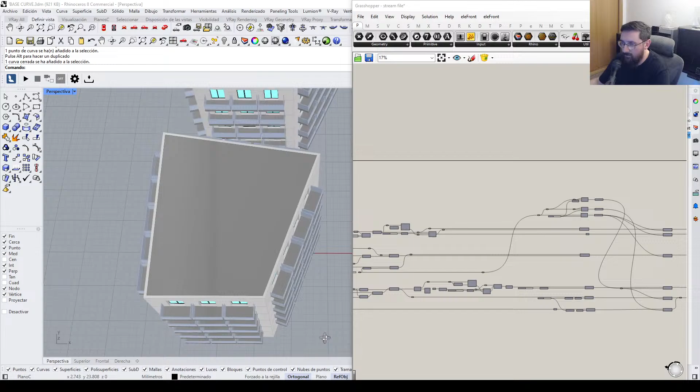If you want to take this further, I guess the next step would be, how would you do this for a curve that's a spline, for example, not a polyline, like something that's curved? Because this logic doesn't really apply for curves unless you convert curves into polylines. That's an interesting exercise. So this can be evolved in so many different ways. I'm going to leave that to you, Walter, you're the genius on this, and I'll probably do it at some other time on a different script. But I think for today this is pretty okay.

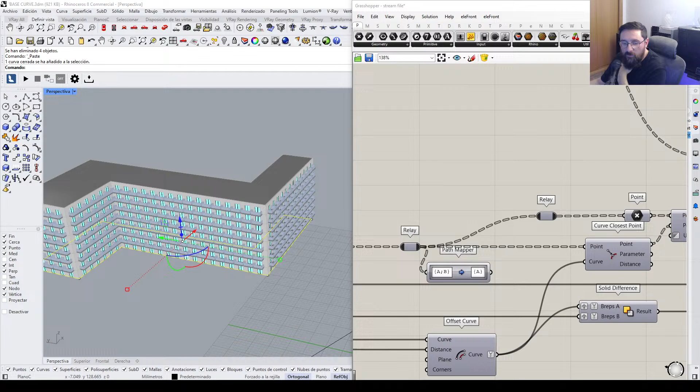I might have to, I feel like this is like an exercise. It's not like a final script, because I feel like this has to be simplified a little bit and stress tested, because there's a lot of things that will affect whether this will work or not. There's a couple I can think of now that would have to be resolved. So I know that, for example, if I make this point really small, something's going to happen here, and I already have a feeling.

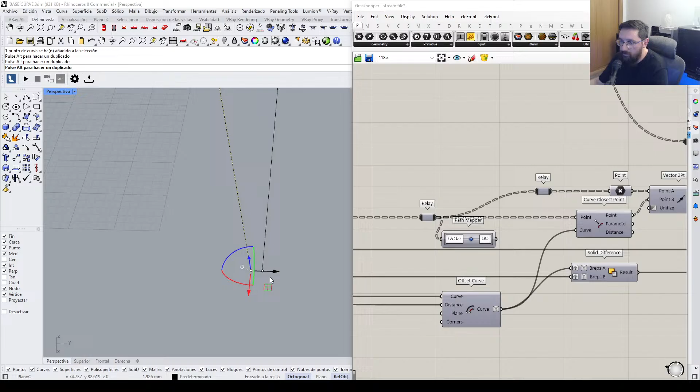Nothing happened. Okay, if I make it really small, smaller than the window width. Nothing happened. Okay, I thought there was going to be an error, to be honest. That's interesting. Okay, fair enough. Nothing to see.

I sent you the simpler way than using a path mapper. I'll definitely check it out. I'll definitely check it out.

Look, see, this is what I meant. Because you can't force this length to be the width of the balcony because it's smaller. So you have to do a culling system over here. There would have to be a different approach, but I'll probably tackle this further down the line. I think I know how to resolve it. It's just that for me to tackle it now on stream means I'm going to go on for like 2 hours more.

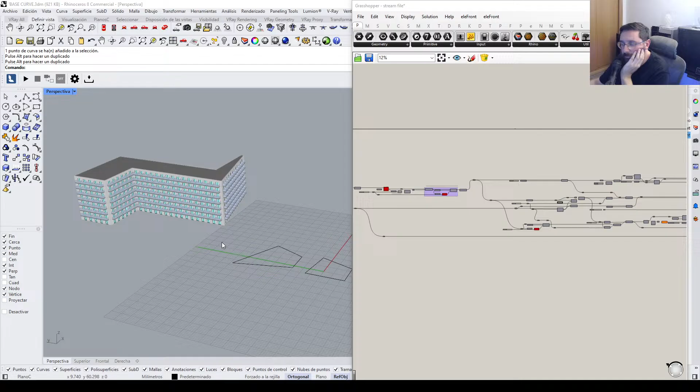Send me the link and I'll check it out in a minute. And yeah, hopefully it's been somewhat interesting, at least the procedure or the idea as to how to break it down into simpler steps. That's the important part. It's not about copying or doing the script exactly as I did it, it's more about the logic.